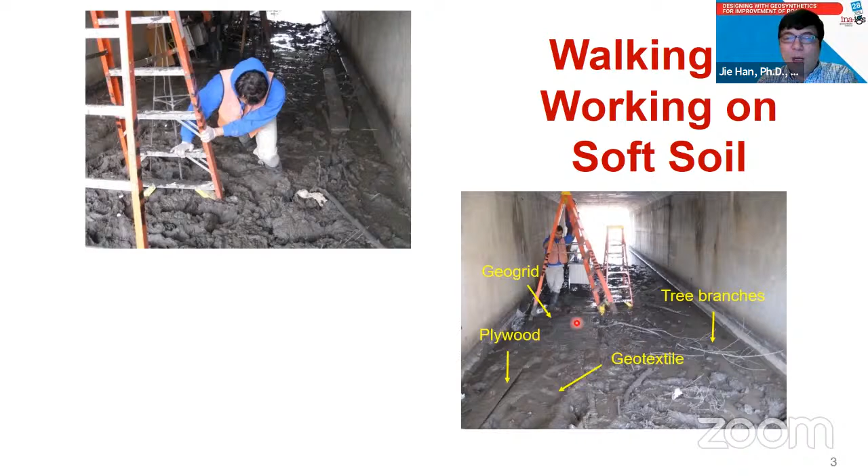Now, what's the difference between geotextile and geogrid? Geotextile is very flexible. The stiff geogrid has a little bit of bending stiffness, but just that bending stiffness is enough to support the weight of one person, and then he finished the job. But this is kind of trial and error with basic knowledge of improvement, right? He knew the soil was too soft, he couldn't walk on this soft soil, but needed some reinforcement or improvement. So he tried different ways and eventually we found a solution.

But is this the state of practice? Of course not. Let's take a look at what the state of practice is for pavement design. This is kind of a transition. We start with some kind of empirical design method - we'll talk about that a little bit later on - basically based on a statistical analysis method. Back in 1950 in Illinois, in the US, they did a lot of truck testing and developed a design method from that.

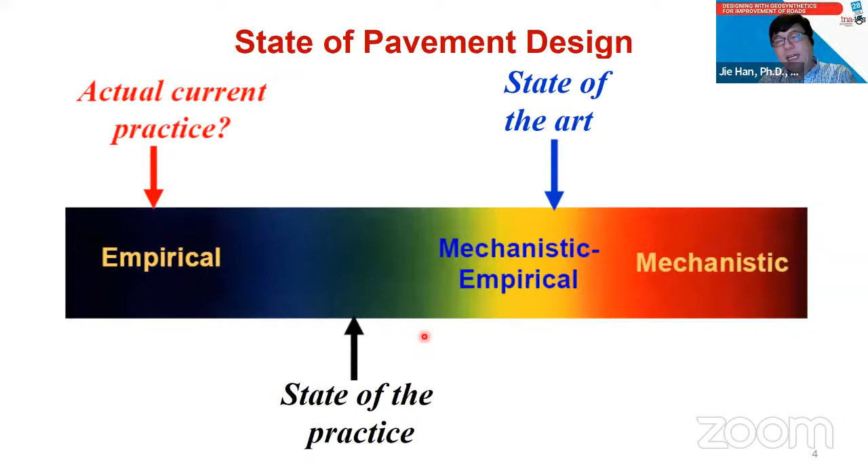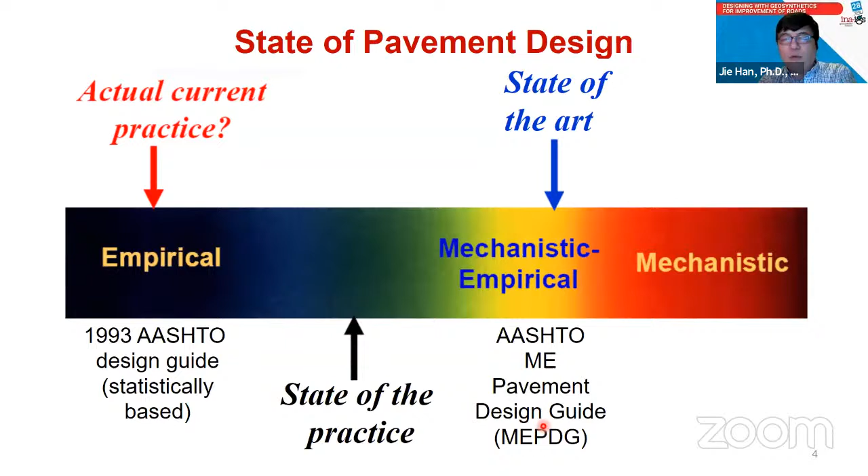Now we are moving towards the mechanistic approach. Mechanistic is basically theoretical, based on mechanics, and this is called mechanistic-empirical - some portion mechanistic, some portion empirical. So this is kind of the state of the art. What is the state of practice? We are in the transition from the empirical design method to the mechanistic-empirical design method, and I will get into that in the lecture. The empirical method is called the 1993 AASHTO Design Guide, a statistical-based method. The mechanistic-empirical one is the AASHTO Mechanistic Empirical Pavement Design Guide, called MEPDG, developed about 20 years ago. So that's the state of practice.

Let's take a look at common distress of roads, starting with unpaved roads. Unpaved road means there's no pavement surface like asphalt or concrete, but there are two different situations. On the construction side, you may have heavy vehicles going on the road to carry aggregate and other material, generating pretty large rutting - this is like a local road, also called a gravel road. Also, after use, you may get some rutting like this. Rutting is the major problem for unpaved roads. Now, how about asphalt pavement?

There are two common problems. One is rutting - even though pavement is stronger than gravel, with a larger number of traffic passes you still can get rutting like this. Or you can get cracking like this, mostly fatigue cracking. Rutting and fatigue cracking are the two common distresses for asphalt pavement.

How about concrete pavement? The concrete pavement mostly fails close to joints - basically the transversal joint, due to less support at the joint. If you have the tire sitting on this location, it will create some kind of joint crack like this.

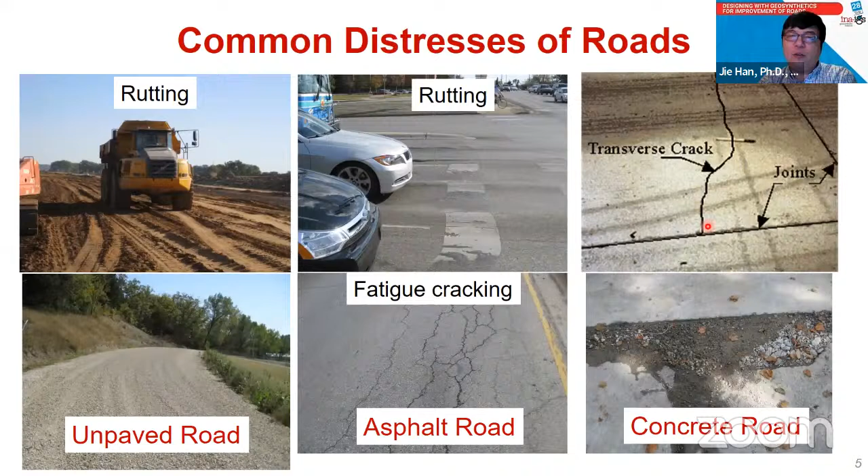Another problem is durability. This is a cold region, so water can get into the joint and get saturated. The concrete gets frozen, then expansion occurs, and salt creates some kind of durability problem. Joint cracking and durability cracking are the two common problems with concrete pavements.

So far, geosynthetics are mostly used to improve unpaved roads and asphalt roads. There are few applications using geosynthetics for concrete pavements. In my presentation today I will focus on unpaved road and asphalt road applications, not concrete pavement applications, even though I've been doing some research in this area.

Let's start with the basic parameter called California Bearing Ratio, or CBR. This is a common parameter used for pavement design. Let me explain a little bit about this parameter.

You're probably familiar with the compaction mold: you put the soil there, compact it into layers, put weight on top, and there's a piston to push down into the soil. You measure how much load is required to push it like 0.1 inch or 0.2 inch, equivalent to 2.5 millimeter or 5 millimeter displacement. That force is divided by the force required to push a crushed stone, which is considered the standard material.

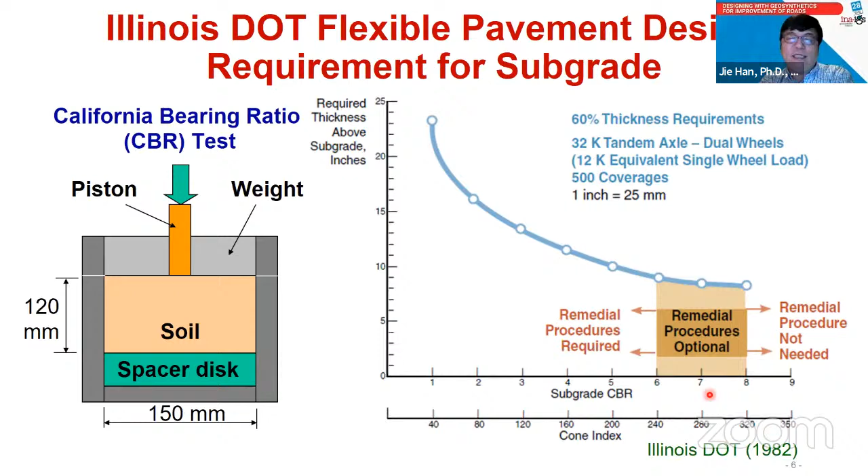That is one number: CBR if less than 6, you need to improve the subgrade. But there's also a guideline developed by the Geosynthetic Materials Association, GMA, which provides a similar guideline but with two different situations: CBR unsoaked and CBR soaked. If your road is subject to rainfall, you probably use soaked CBR - that's typically what we use for design.

In other words, if you have a CBR greater than 3, the subgrade is reasonably strong, and you only need to use non-woven geotextile as a separator. But if it's 1, 2, or 3, it gets weaker, and you need reinforcement - then you need to use geogrid or woven geotextile. Now if the subgrade is even less than 1, that is very, very soft, and for that case you not only need reinforcement but also need separation.

For geogrid, you also need to use non-woven geotextile underneath the geogrid, otherwise the soft soil would squeeze through the aperture. Or you can use the woven geotextile.

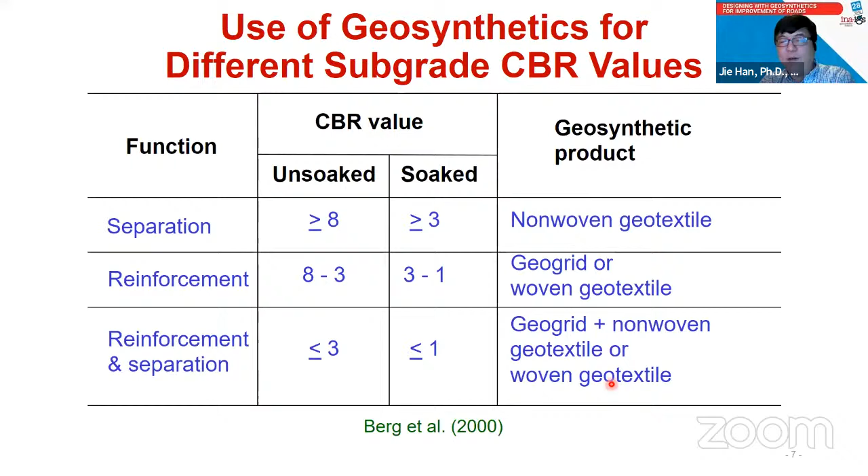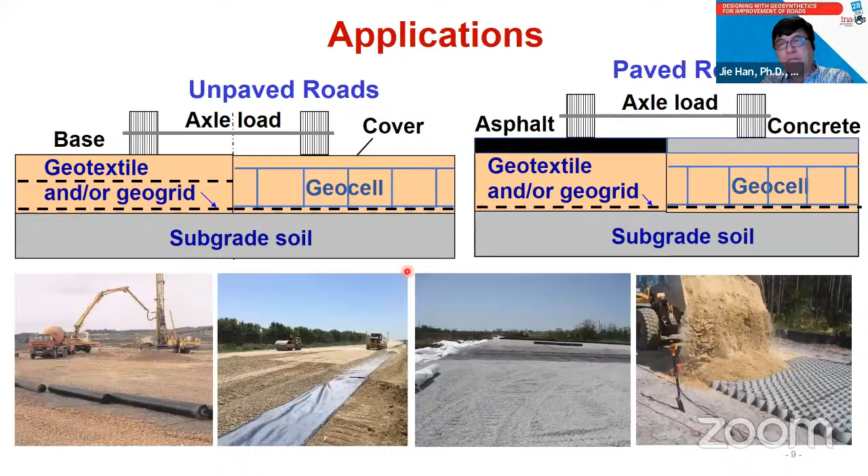In terms of function of geosynthetic in road, it can be used for separation, mechanical stabilization, and lateral restraint as confinement. I'll spend a little time on this - it's a bit different from the reinforcement I mentioned earlier, which is used for slope stability, retaining walls, and embankment applications. For roadway applications it's a little different. We came out with different terminology or function called mechanical stabilization, filtration, drainage, and barrier. So let's take a look at the mechanisms and benefits.

Let's start with this one. The first one is separation - basically separating the subgrade material and the base course material to prevent intermixing of those materials. You can keep the base course clean, just like before, with no contamination from the fine material from the bottom.

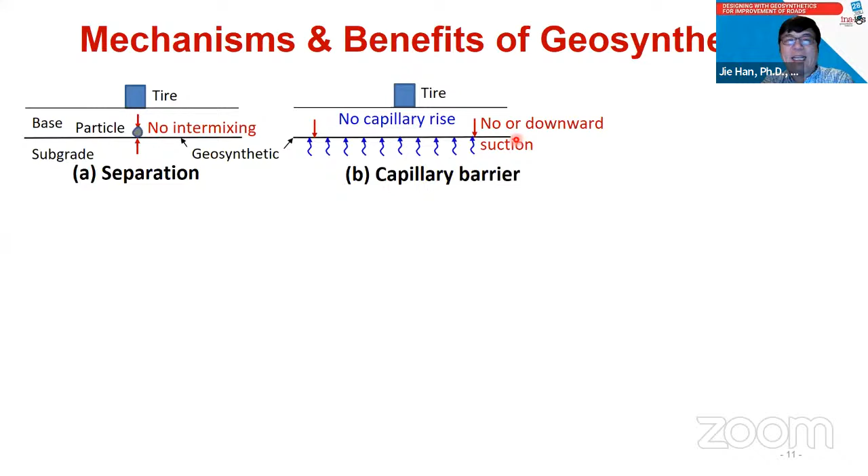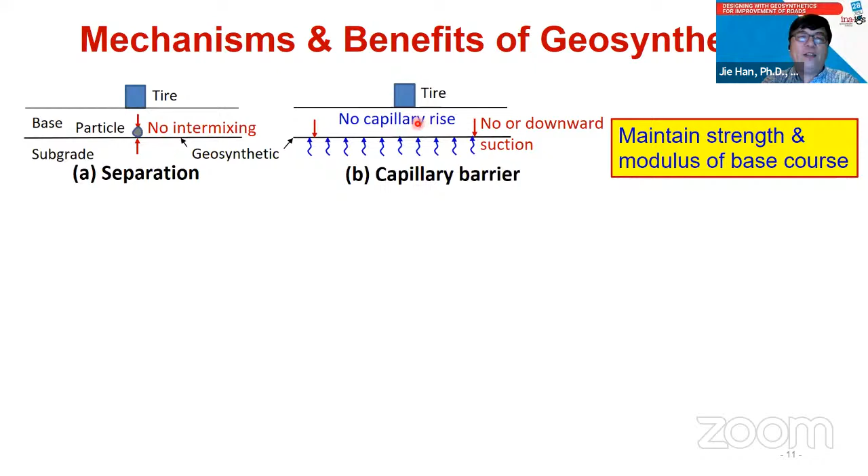But there's another situation where we can use some kind of geosynthetic - for this case, a wicking geotextile to prevent capillary rise into the base course. Especially if you have a base course with fines, they will attract water from the subgrade. If you place the geosynthetic, the wicking geotextile here, it will stop the rising. The reason is the wicking geotextile will suck the water downward and allow it to evaporate. For both of these mechanisms, basically you maintain the strength and modulus of the base course, because you try not to change the moisture content or the fine content here.

Now, this is the typical application - basically tension membrane. When we have the tire sitting on the road, we develop some differential settlement, and the geosynthetic will develop tension. The vertical component of the geosynthetic will carry the load. That mechanism we call tension membrane - this also refers to the reinforcement function.

If we have a soft subgrade, as we talked about earlier, the subgrade will start to heave up under the loading. If you have a geosynthetic here, it provides what's called vertical restraint, not allowing the soft soil to heave up - that will increase the bearing capacity of the subgrade. Also, when you place a geosynthetic here, suppose the slip surface might otherwise go deeper - because of the geosynthetic, they limit the slip surface from going deeper, increasing the bearing capacity of the base course. These mechanisms basically increase the strength of the subgrade and the base modulus.

There are two more things. One is lateral restraint. Under wheel loading, we're dealing with aggregate base, and the aggregate base will start to laterally spread. If you have friction from the geosynthetic, it can minimize lateral spreading and also reduce deformation from wheel loading. The last one is basically drainage - you can place a drainage layer so water can drain out, reducing moisture content here. For both of these mechanisms, you increase the strength and also the modulus of the base course.

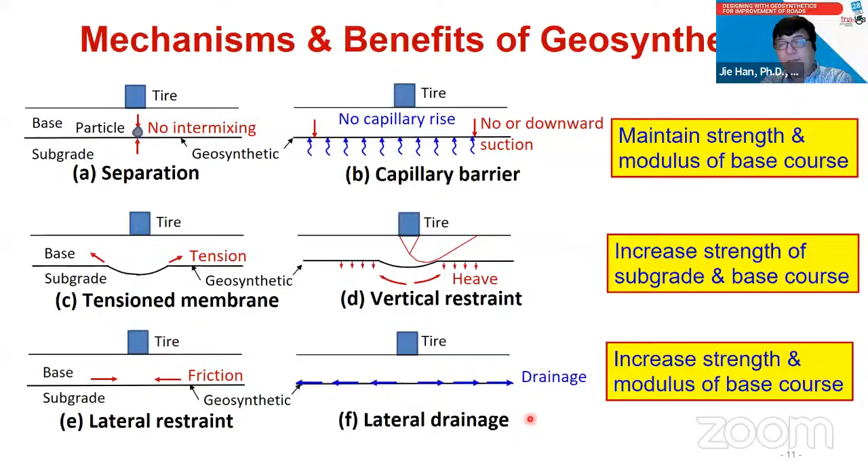The two things, tension membrane and lateral restraint, have been subject to debate about what's the difference between those two. We came out with the idea to try to separate those two mechanisms through this equipment.

This is the test setup called trapdoor test. You see there's a door underneath here, there's the plate, and we can load the plate just to see what kind of deformation occurs above this. We can also place a geosynthetic there and put a strain gauge to measure what kind of tension develops on the geosynthetic.

This is the illustration, this is the trapdoor. During this test, we lower the trapdoor first, and then we measure the strain distribution like this. This is at the edge of the trapdoor, and you see very large tension develops at the dislocation because there's a tension membrane effect developing.

After we lower down the trapdoor, we stop and fix it. Then we apply the load from the top to generate lateral spreading, and see what kind of tension will generate in the geosynthetic. That's what we see for the first one. In order to mobilize the tension membrane, you have to have an anchorage. If you don't have an anchorage, you will not have a tension membrane.

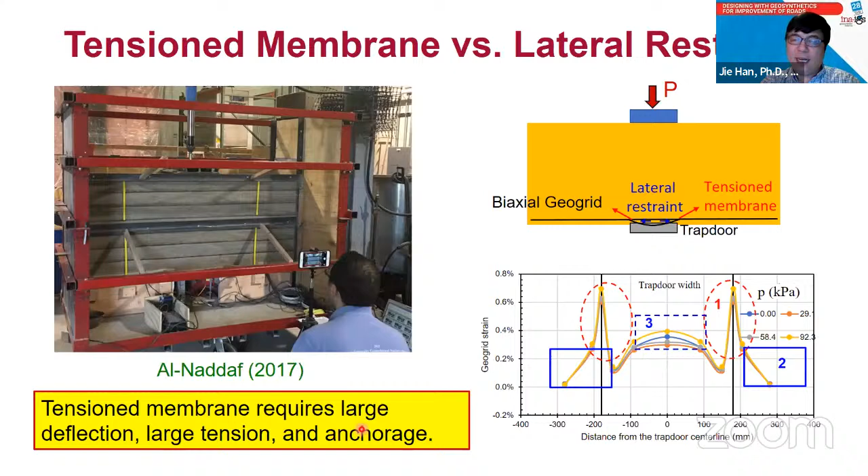After we apply the load, you see the change of stress in the middle. You will not change the tension here, only in the middle, because of the lateral restraint. The tension membrane requires large deflection, larger tension, and anchorage. Those are the three things for tension membrane.

Now let's talk a little bit more about lateral restraint. The actual lateral restraint mechanism was observed, or proposed by Haliburton back in 1981, when he described wheel loading and the generated lateral spreading, eventually generating shear stress on the geosynthetic, and also generating tension in the geosynthetic.

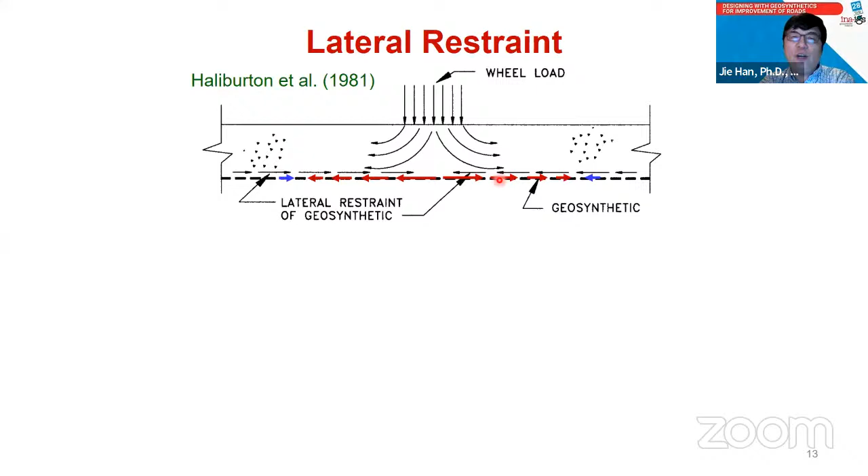But if you read carefully about this drawing, you see there is another direction, and outside this direction they actually generate compression. So you have a zone of tension, and then outside there will be some kind of compression.

The numerical analysis actually observed that behavior. This numerical analysis was done by ITASCA, comparing different kinds of geogrid apertures - this is biaxial, this is triaxial, and the wheel load. As you can see, the red in the middle is tension, and blue is compression outside.

As you can see, for this lateral restraint you don't need the anchorage. As you know, geosynthetics typically cannot carry high compression, but even if you cut the geosynthetic at this portion here, it will not affect the geosynthetic's ability to resist the lateral spreading, because the compression strength will not add much resistance to the load.

Another thing I want to point out: this is how much tension is basically calculated in the geosynthetic. For this product, if you recognize it, this is a 20 kilonewton per meter product, but you only mobilize 2.5% strength for this case. How about this one? For this one, the stress is even lower, only 1.4% strength mobilized.

For this case, as you can see, because it's a triaxial geogrid, they have a better shape to distribute the load in the ribs, but you only get almost half of this tension under the wheel. Another point I want to make is basically you don't need much strength to resist this load through lateral restraint, but the stronger product is not necessarily better.

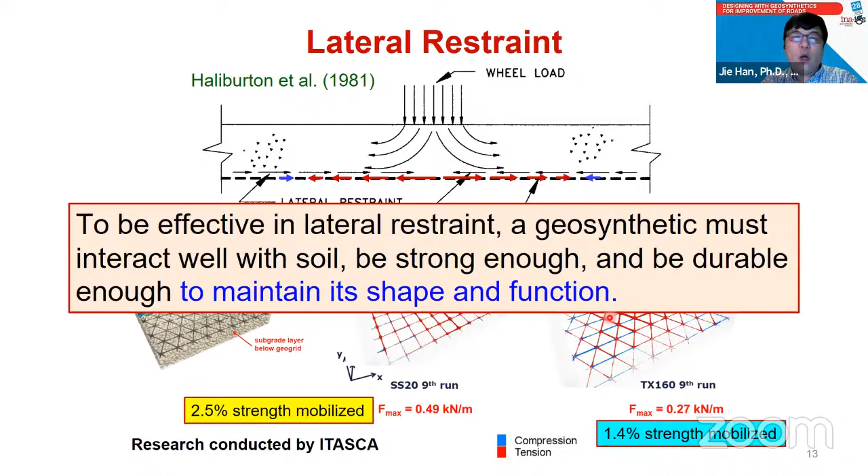Let's take a look at this case. Professor Brown in UK did this study - it's a very interesting study. He dealt with a railway application, with a loading plate under cyclic loading, and a geogrid here. He only dealt with biaxial geogrid with ballast.

He measured the settlement after 30,000 load cycles. What are those numbers? This is the 40 kilonewton per meter tensile strength geogrid, and that one deformed the most. This one is 20 kilonewton per meter geogrid, and it deformed the least. The stronger product does not necessarily mean better.

The better one is basically - he found out the aperture size. The aperture size interlocks better with the aggregate size - the maximum size is 50 millimeters, mean size is 38 millimeters. He found this optimal aperture size as compared with aggregate size, coming out with a number: aperture size of 1.5 times the maximum particle size, or aperture size 2 times the mean particle size, reaches the optimal situation, basically interlocking the geogrid with the aggregate.

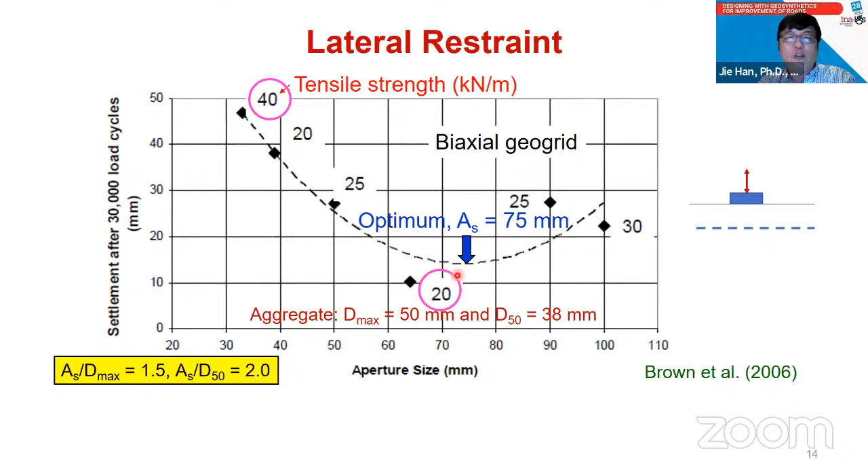Unfortunately, high strength, high resistance does not result in better performance. The performance depends on geogrid-aggregate geometry compatibility, basically the aperture size divided by the particle size.

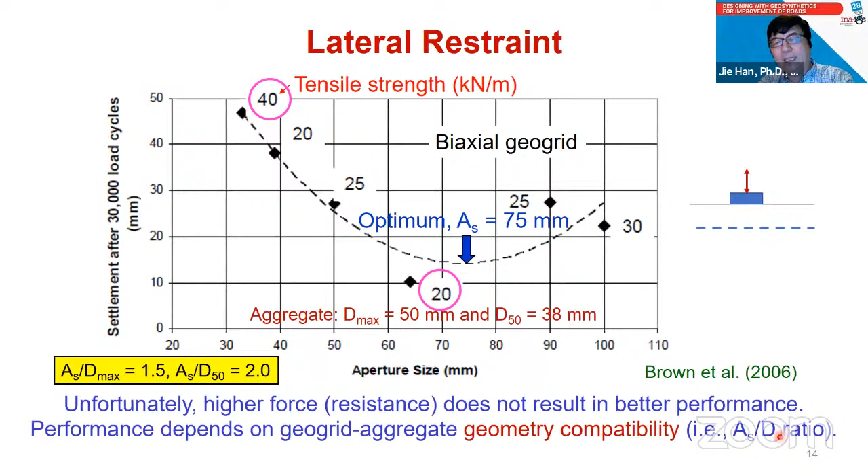Okay, now let's take a look at the comparison between lateral restraint and the tension membrane.

When we talk about lateral restraint, basically under the load, the particles have a lateral spreading. Generally, we consider the shear stress: over the shear stress there's tension in the middle and compression outside.

But that mechanism typically refers to mechanical stabilization. This typically happens at small deformation, okay? You do not need a large deformation.

Now, different from that, as I showed earlier, with the tension membrane you have a very large tension. You need a large deflection, and you also need the anchorage. Without anchorage, you will not have any tension developed in the tension membrane.

But this is basically for the reinforcement effect, okay? This requires a large deformation. Now, the tension for the tension membrane is much higher than the tension required for lateral restraint.

But they can transit from one situation to another if the deformation gets larger. Basically, when the deformation gets larger, the lateral restraint may become the tension membrane at the end.

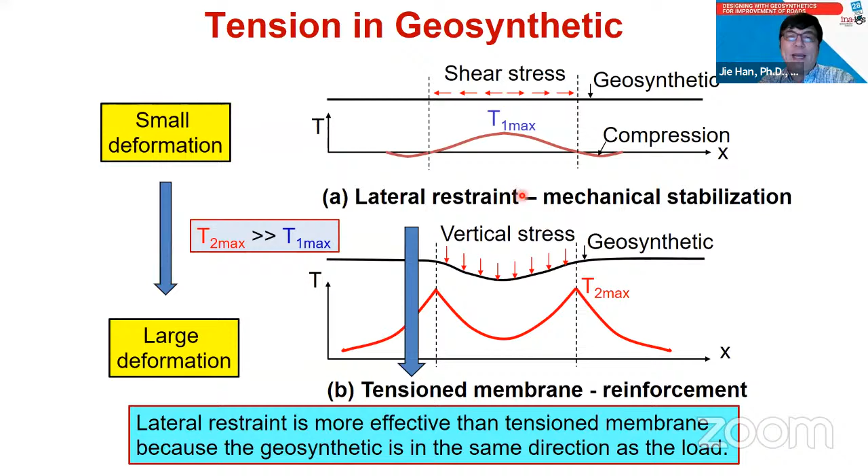Now, lateral restraint is more effective than the tension membrane because the geosynthetic is in the same direction as the load. As you can see here, this load-generated shear stress is in the same direction as the geosynthetic. But if you look at the tension membrane, the load is 90 degrees to the orientation of the geosynthetic. This is why tension membrane is not as effective compared to lateral restraint.

But for most applications in the roadway, you may actually have a different kind of mechanism. You may have separation, filtration, reinforcement, and mechanical stabilization all together. This is why geosynthetic may serve different functions in roadway applications. Therefore, a generic term, improvement, may be used for combined functions.

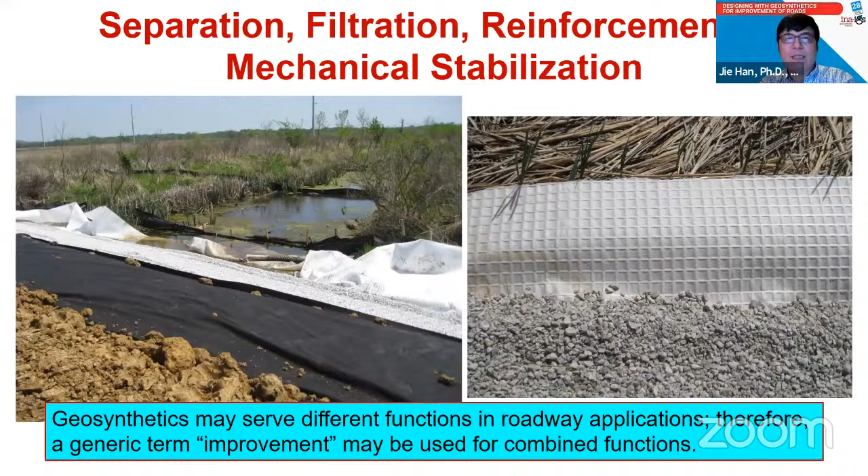Now, in order for geosynthetic to really work, first you need to make sure the geosynthetic can survive the construction.

For this case, you see they use a very large stone and dump it on the geotextile. I'm not sure whether the geotextile will survive, but this is one thing we also need to consider when you choose the geosynthetics.

The resistance to site-specific destructive force applied during project construction and in-service operation should be considered. That relates to the condition of the subgrade, the type and thickness of cover aggregate, and the ground pressure of the construction equipment. But geosynthetic can function and provide benefits only if it survives.

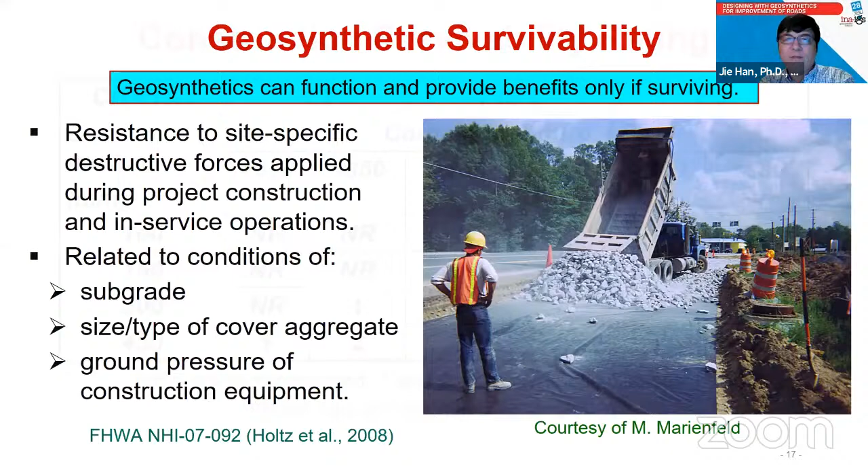Now, what kind of requirement for Geogrid? This is basically dealing with Geogrid. As you can see, for Geogrid, not only do you have class 1, 2, 3 with different strengths, but they also need to make sure the aperture size. The aperture size basically needs to be within this size range.

Also, it needs to be greater than the mean size, and less than 2 times the D85. This is similar to the results Professor Brown got in his study. This is basically to make sure that you have a better interlock.

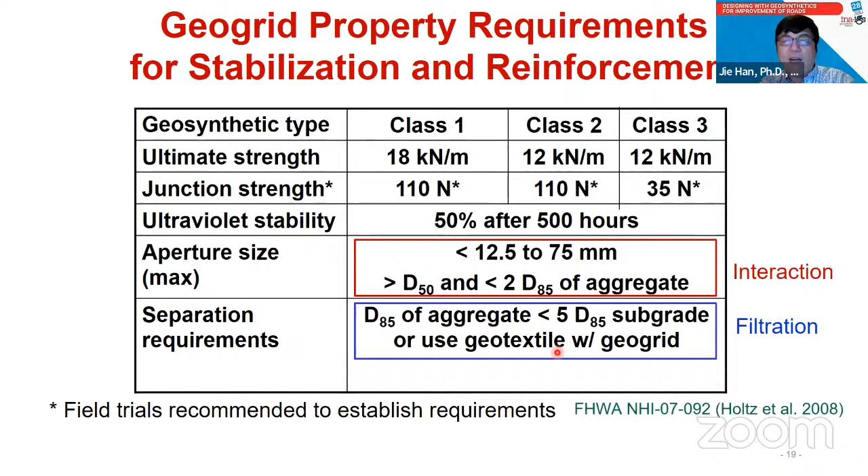Another thing we need to consider regarding separation: because the Geogrid has openings, we need to rely on the aggregate to provide the separation or filtration function. But if you don't have that aggregate, then probably you need to use a geotextile to serve as a separator.

Now let's move on and talk about the design for the two different applications, one dealing with unpaved roads, one dealing with paved roads. As we know from the mechanistic solution, if you apply stress on the top, the stress will decrease with depth, right?

But the decrease of stress for unpaved roads is different from paved roads. The reason is that paved roads have a stiff layer on top like asphalt, then a base course, then a subbase. But for unpaved roads, you only have an aggregate layer. If you apply say 600 kilopascal, at the top of the subgrade you may still have 100 to 200 kilopascal pressure. For that high pressure, the subgrade may fail if it's not strong enough.

So what is the important parameter? It's undrained shear strength for that case. The major failure, the distress, is rutting, as I mentioned earlier on. Basically it's a bearing failure. So for this case, it's a strength-based design.

For paved roads, because you have the stiff asphalt layer, base course, and subbase, eventually getting to the subgrade, the pressure will be only 10 to 20 kilopascal. So for most cases, you don't have a bearing capacity problem. However, you may have a compression problem.

The compression is related to a parameter called resilient modulus, which we'll talk about a little later. For asphalt, you also get tensile stress at the bottom of the asphalt. So the failure modes, as we talked about earlier, are rutting and fatigue.

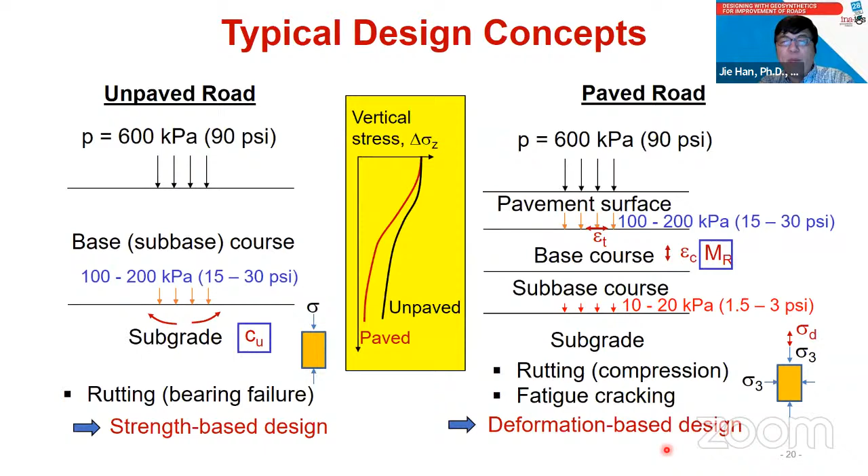The paved road design is typically a deformation-based design, different from unpaved road design. Here's a typical performance curve showing rutting versus number of passes. For unpaved roads, you will have some kind of bearing failure at the end, failing either because of the base or because of the subgrade.

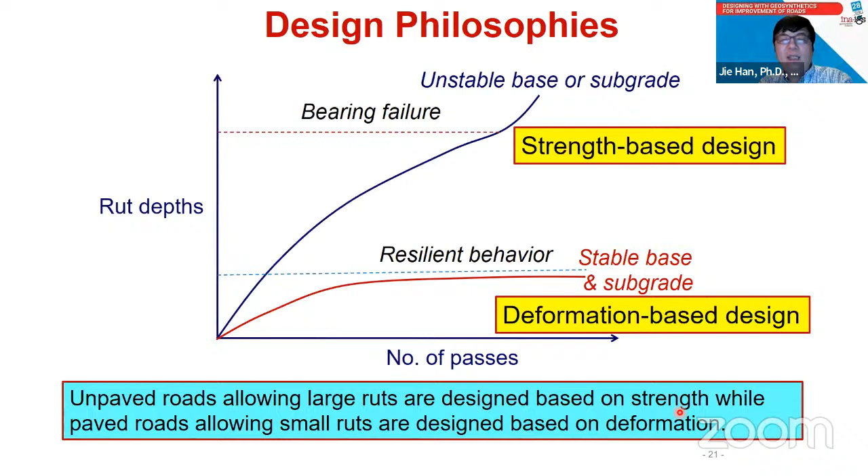Now for paved roads, this is called resilient behavior. They will have cyclic behavior, but you will have a stable base and subgrade. So unpaved road design is strength-based, while paved road design is deformation-based. Unpaved roads allow large rutting and are designed based on strength, while paved roads allow only small rutting and are designed based on deformation.

So let's talk about the concept of elastic deformation, permanent deformation, and resilient deformation. This is a triaxial test, showing deviatoric stress versus axial strain. In the first cycle, the load test control without geosynthetics, you would measure what's called the elastic modulus—this is the elastic deformation.

Then if I remove the deviatoric stress, you unload it, and you can measure another modulus. This is called the resilient modulus, or rebound. Basically, this is the resilient deformation. Now you can see the slope is not the same—typically the resilient modulus is greater than the elastic modulus.

The resilient modulus is defined as the deviatoric stress divided by the resilient strain. Now, if we add geosynthetics, because when you push down, the geosynthetic provides lateral restraint and additional confinement stress, you get a curve with smaller deformation and a somewhat larger elastic modulus. Then you unload again and get the resilient modulus.

Now what happens here: for the first cycle, you'll find that the elastic modulus for the improved case is greater than the control case. However, it's still less than the resilient modulus. Now, if you compare the resilient modulus for the control section and the improved section, their resilient modulus is actually almost the same.

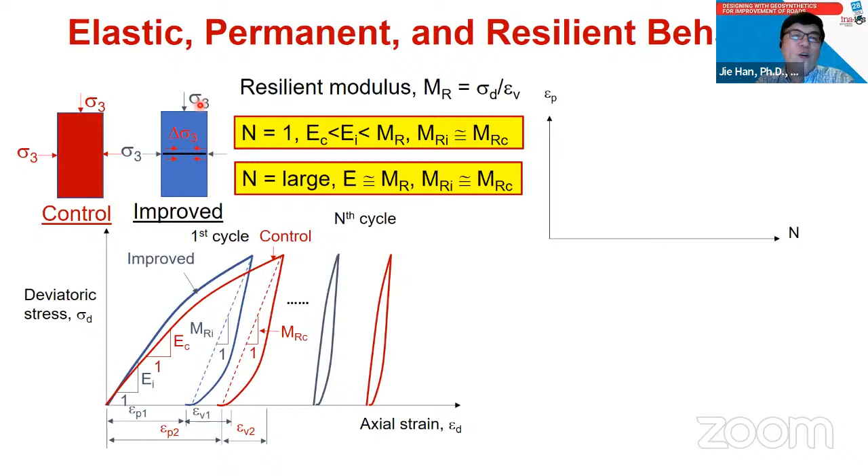The reason is that resilient modulus is defined as deviatoric stress divided by the resilient deformation, or rebound. As you know, when you release a load and the specimen starts to rebound, the horizontal geosynthetic cannot restrain the vertical movement. This is the reason the geosynthetic cannot increase the measured resilient modulus: the resilient strain is perpendicular to the geosynthetic orientation, so the geosynthetic cannot provide any vertical restraint during the rebound.

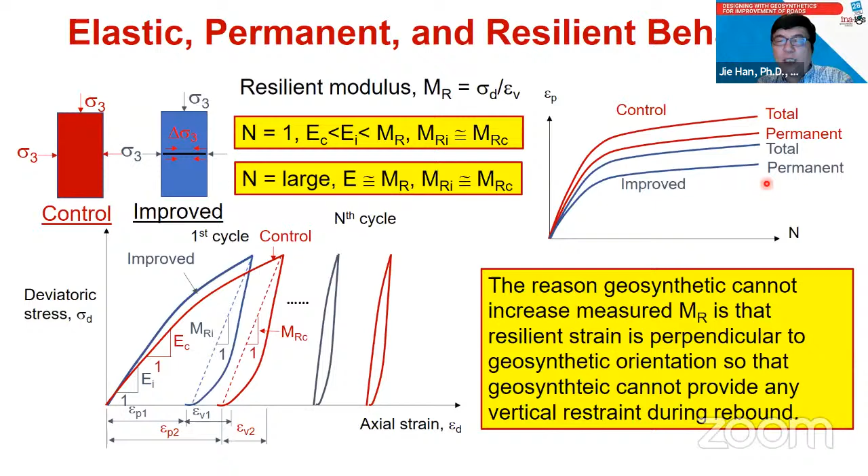So what do you end with? This is a control, like a total deformation, and then you have a permanent deformation. The difference is basically the elastic deformation. If you improve one, you have total deformation here and permanent deformation here, and eventually you get a larger reduction of permanent deformation.

This is an important point: geosynthetic is more effective at reducing accumulated permanent deformation than elastic deformation, because elastic deformation only happens for individual cycles, but permanent deformation accumulates, and the accumulated lateral restraint minimizes more permanent deformation. Let me show you the results.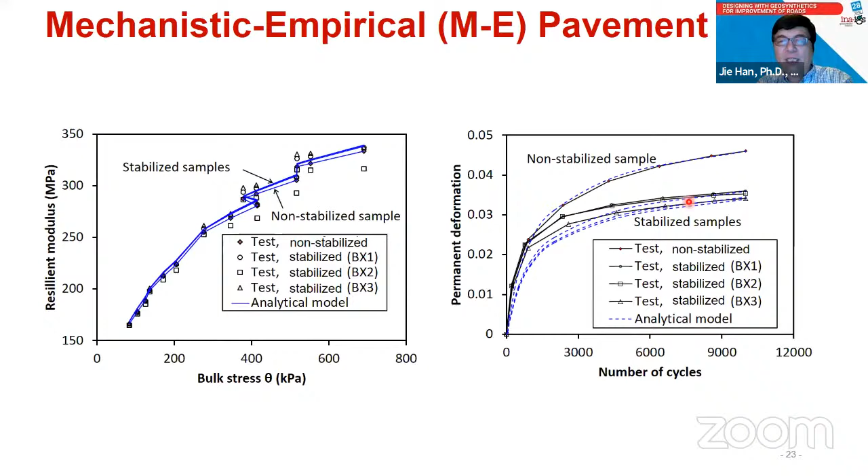Now let's move on to the design method, the mechanistic empirical design method, as I mentioned earlier. This is the new design method - a very comprehensive one that can consider climate, materials like pavement surface and base course, and traffic loadings. From traffic loading we can calculate the stress-strain response, then use this for accumulated damage.

Mechanistic, empirical. Let's talk about layer elastic theory. The famous solution was developed by Burmister back in 1945. Let's start with the stress on top of the surface, then calculate the stress at depth. If this is a uniform material, you can use the Boussinesq solution as learned from soil mechanics - the shape looks like this, largest stress at the center, decreasing with distance.

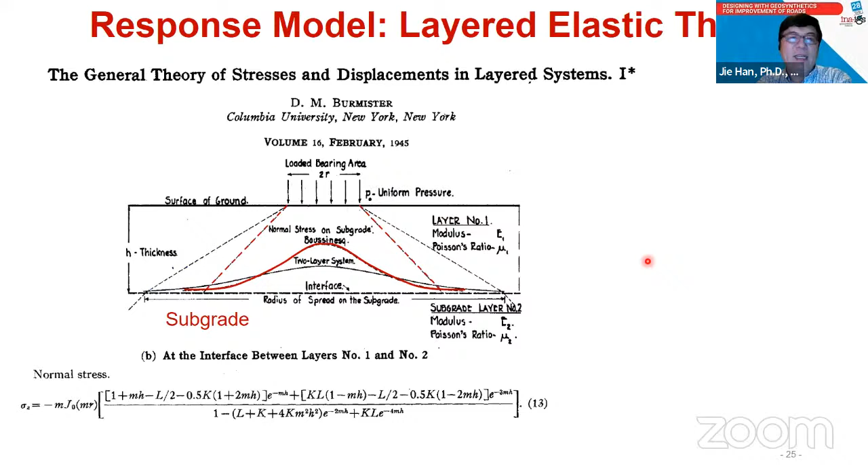Now, typically we use the stress distribution method to simplify the calculation. If we have a pavement, E1 - the pavement modulus - is greater than the subgrade modulus. This creates a situation where, using Burmister's solution and layer elastic theory, the stress gets reduced because of the stiff layer.

But now the stress looks like this. If you still use the stress distribution method, the distribution angle gets larger. That's the stress reduction, and also the increase in distribution angle.

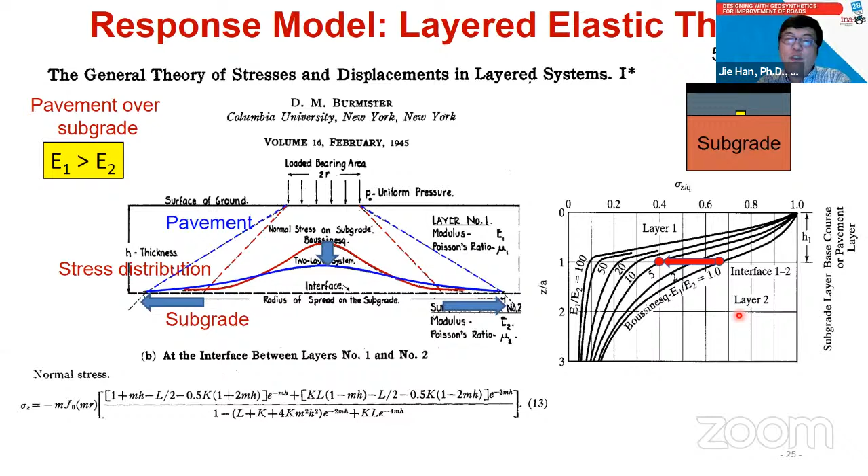So we did a study to measure the vertical stress for one case with asphalt pavement and base course, with and without geosynthetic, to see how the vertical stress changes. This is also Burmister's solution - if we have the depth here, the stress at this location, and if we increase the modulus by 5, we reduce the stress at this location.

That's the benefit of using a stiff layer in the pavement. Our results show the control section measured high stress, but if we use a geocell with the same thickness, we get reduced stress by almost half or more. The geosynthetic indeed helped reduce interface vertical stress.

Now let's talk about design with geotextile for separation in roads. As we know, in this case there's no separation - the subgrade and base course intermix, generating very large rutting.

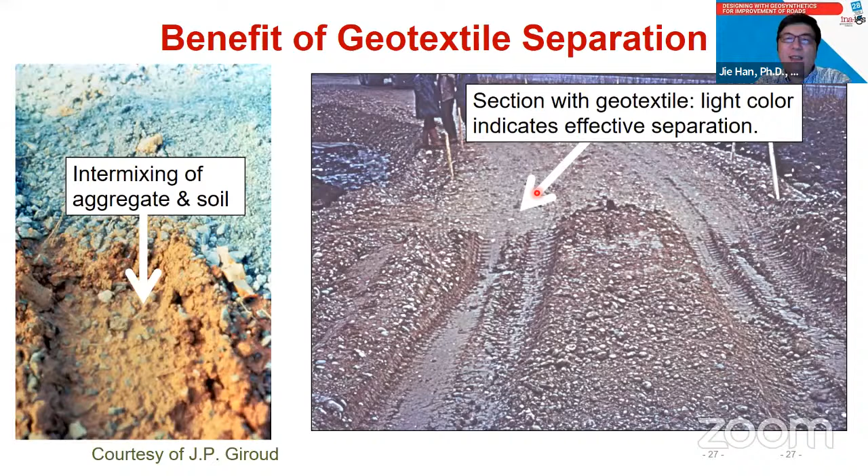Now if we place geotextile there - this is a very nice test. This section has geotextile, this section doesn't. As you can see, for this light color section with geotextile, it indicates very good separation and the rutting depth is very small. But on this side, without geotextile, you generate very large rutting. The geotextile does separate the base course and subgrade.

So how do we design for this? Federal Highway has a design guideline based on experience data. This design chart can help estimate percent of aggregate loss; the empirical graph was developed based on observations of unpaved roads without geosynthetics.

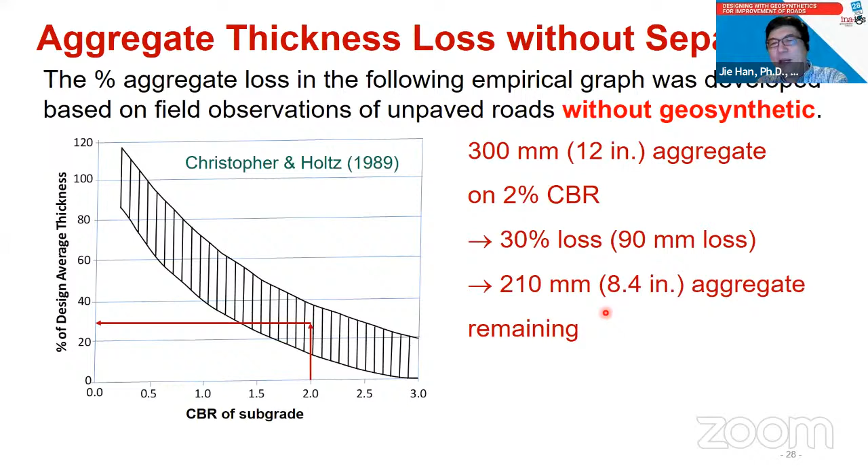Let's say if I have a subgrade with CBR equal to 2, you will have a 30% aggregate base loss. So if the base course is 300 millimeter, with 30% loss, your remaining base thickness will be 210 millimeter. Of course it will not perform as designed because you lost the aggregate into the subgrade.

The use of subgrade geotextile separator prevents this aggregate thickness loss. Now if you want to design the geotextile for long-term performance, the filtration criteria should be met.

Here is a real study from Oklahoma DOT, not too far from Kansas. The original traditional design used a 60 centimeter lime-treated subgrade before placing aggregate base, with a chip seal layer on top. Now they changed this - they did not treat the subgrade, instead they placed non-woven geotextile before placing aggregate. So basically they used non-woven geotextile to replace the 60 centimeter lime-treated subgrade.

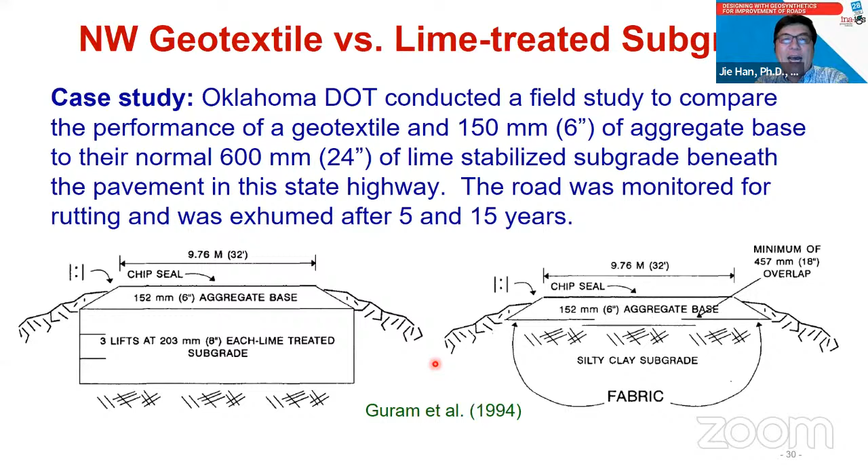They excavated after 5 years and 15 years. This is what you see in the excavation after 15 years. The geotextile still performed very well, and you can also see some wrinkling. But that also proved there was no tension membrane happening in the pavement.

As you see, if you use tension membrane, this would stretch out, right? But the fold is still there. Another thing they found out is that particles basically leave an impression on the geotextile and interlock with it, providing lateral restraint.

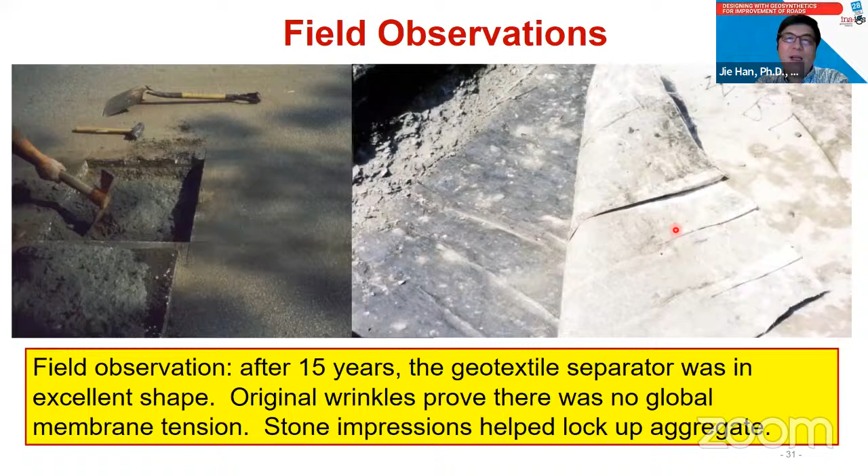This project's geotextile option only costs about one-third of the cost of a lime stabilized section. That saves a lot of money for that project.

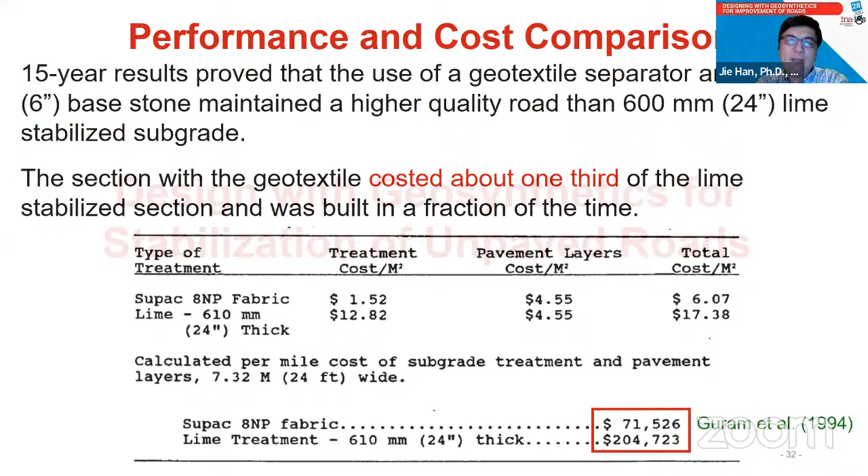Now let's move on to talk about design with geosynthetics for stabilization of unpaved roads. There are many different design methods available, mostly based on strength methods. In this presentation I'll focus on two methods due to time limits - strength-based methods, though we've also developed deformation-based methods with my former PhD students. We won't have time to cover those, but we'll talk about these two design methods.

Let's start with the Steward method. This method is very simple - they assume uniform layers and do not distinguish between base course and subgrade. They use a mechanistic solution to calculate vertical stress, making sure the vertical stress is less than the bearing capacity, Nc times undrained shear strength.

This is a strength design. Nc is the bearing capacity factor, depending on whether you use a geosynthetic or not. Without geotextile, you have a lower bearing capacity factor. With geotextile, you have a higher bearing capacity factor. They also found that if you have larger deformation, you mobilize higher bearing capacity factors.

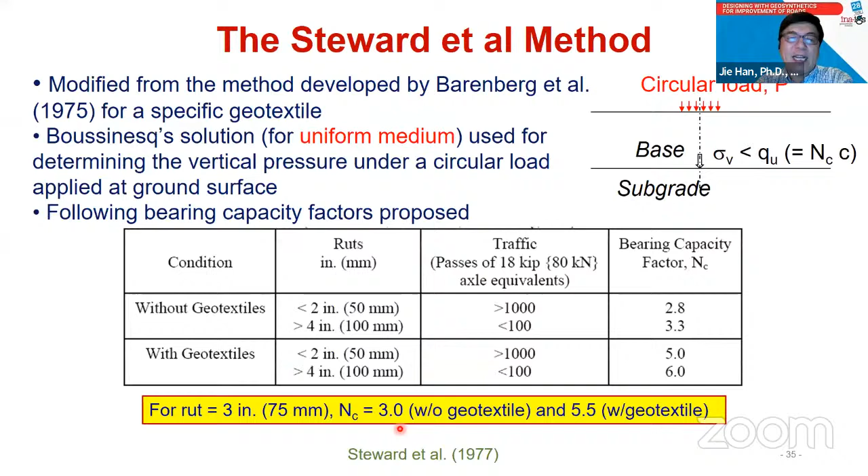If we take an average, typically we design for 75 millimeter rut depth, and let's say bearing capacity without geotextile is 3, with geotextile 5.5. They developed a design chart to help engineers select the thickness of base course. Here's an example.

This is based on a single wheel load, 45 kilonewton, with 2,000 passes. If subgrade CBR is 1%, we can estimate the undrained shear strength is 30 kilopascal. Without geotextile, using bearing capacity equal to 3, C times Nc equals 90. With geotextile, using 5.5, C times Nc is 165.

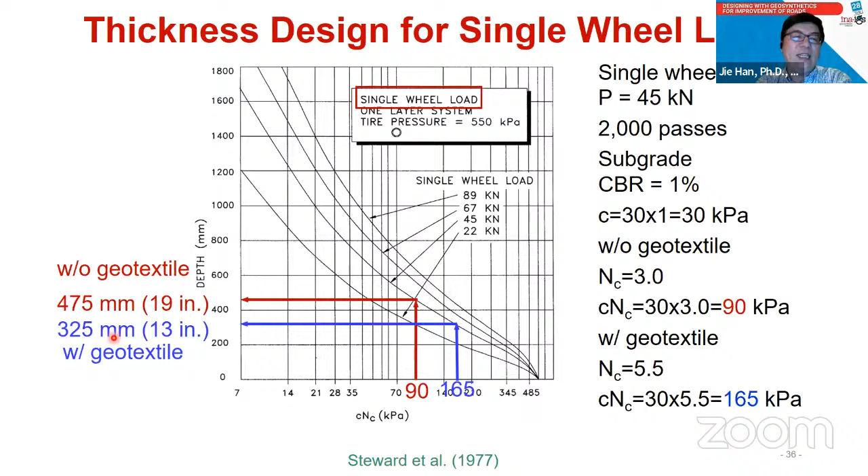Coming to this figure for a single wheel load, if you bring 90 down to the curve with a 45 kilonewton wheel load, you determine the thickness of base course needed without geotextile is 475. Now if you use 165 with geotextile, coming to the same wheel load, the thickness is equal to 325. That gives you a 32% base course thickness reduction. It's a very simple design procedure you can use.

As Michael mentioned about Dr. Giroud, we worked together and published two papers in 2004, developing a design method for geogrid reinforced unpaved roads.

This method has been included in the Federal Highway Design Manual. So I would like to spend a little bit of time to talk about this method. The first step in this method, we'll need to check whether the base is strong enough to carry the load.

This is a design chart that you may use to estimate whether the base is strong enough. Let's say, apologies, this is in English units, but at 100 PSI pressure with single wheel load of 10 kips, if you find the base CBR, you can know the number of passes it can carry. For this case, 10,000 passes. The base should be strong enough to support the traffic. All design methods assume the base is strong enough.

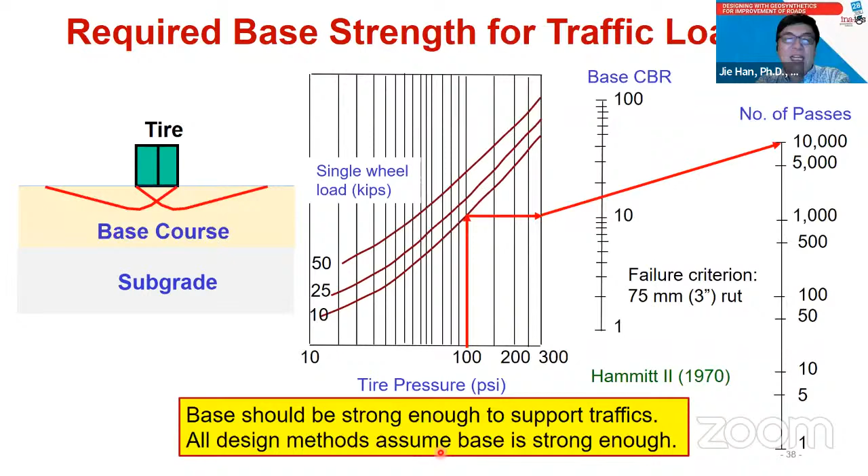But now we also use the stress distribution method to calculate the stress at the interface between the subgrade and the base course. The difference from the previous method is that now we consider the distribution angle depending on the modulus ratio, the base modulus divided by the subgrade modulus. You can calculate a larger distribution angle with a stiff layer on top.

We developed a model. Basically, initially the distribution angle is large. With traffic loading, because of deterioration of the base course, the distribution angle gets smaller and smaller, and eventually you get higher pressure, which causes bearing capacity failure, right?

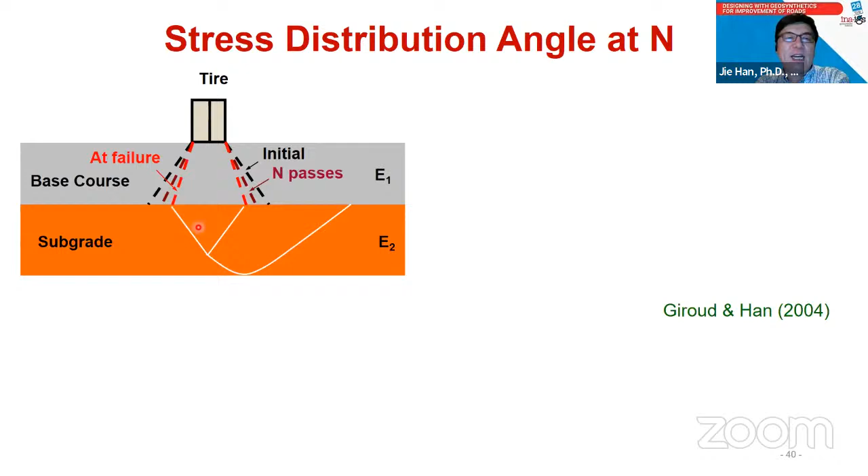We developed this empirical formula. Basically, lambda is the distribution angle reduction rate. If this equals 0, it means there's no reduction, basically like static loading. But with number of cycles, the distribution angle will reduce.

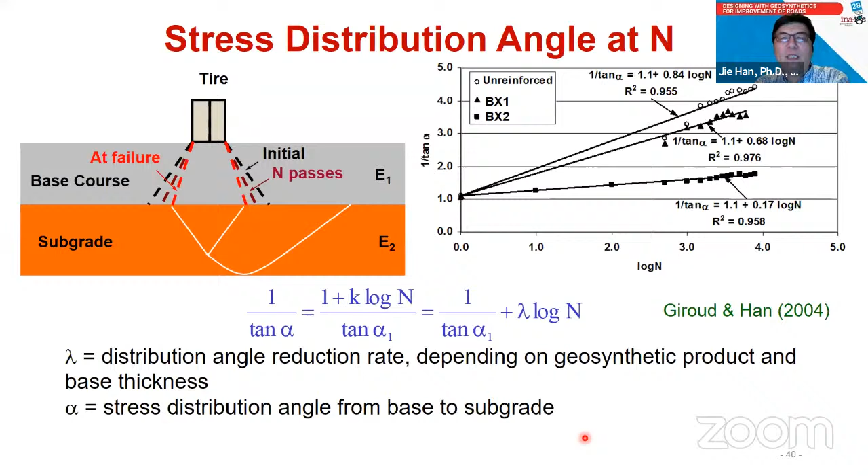Lambda actually depends on two things: the geosynthetic product, and the base thickness. If you have a thick base, lambda is smaller. If you have a better geosynthetic, lambda will also be smaller. As you can see here, this is the one with a stronger geogrid.

This is the empirical method, with damage from traffic. We assume that the tire is axisymmetric, circular, so we can calculate the pressure at this location using the distribution method.

That pressure should be less than the bearing capacity factor. We introduce M, the bearing capacity mobilization factor. Basically, depending on different rut depth, M will change. If you have a larger rut depth, M will be larger.

Similarly, we have a bearing capacity factor for different situations, like control 3.14; geotextile, because of a smooth interface, 5.14; geocell is 5.14; and geogrid will be 5.71 because geogrid provides a rough interface.

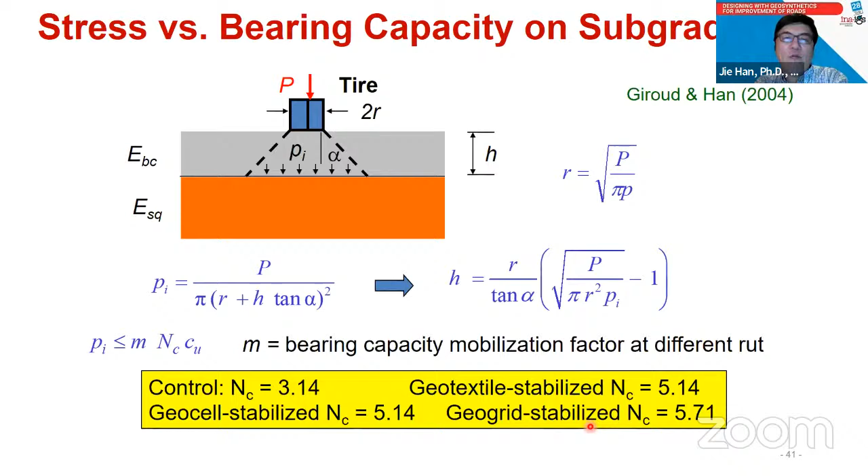We came up with a design chart and design formula like this. There's one important parameter with geogrid called aperture stability modulus, an ASTM standard. I will not get into detail about aperture stability, but basically this is the stiffness of the geogrid.

We also developed a design chart for that, this one basically describing the geosynthetic property. You need iteration to determine the thickness of the base because you have a form of H on both sides. But this convergence is very quick, typically you need only 2 iterations to reach the solution.

If we know the CBR of the subgrade is 1, and we go here with the number of cycles, we can determine the thickness for this case with geogrid.

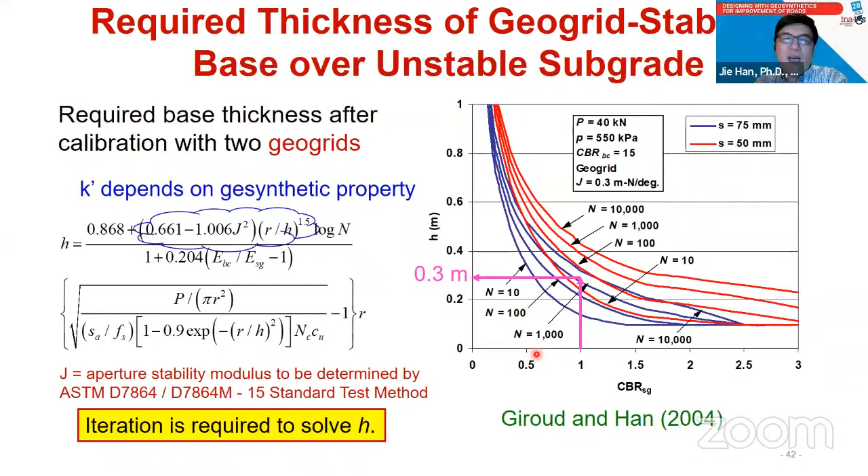This is my former PhD student, and he was working on the geocell. For geocell, because we don't have the aperture stability modulus, he recalibrated this factor for geocell.

Now let's talk about a case study here, a very interesting one actually in China. Originally, they designed with large replacement of the soil, like 1 meter, then the subbase and base course layer. Because the groundwater table is too close to the surface, when they excavated down they had all the water, and they needed dewatering.

But they came up with the idea of using a 2-layer triaxial geogrid.

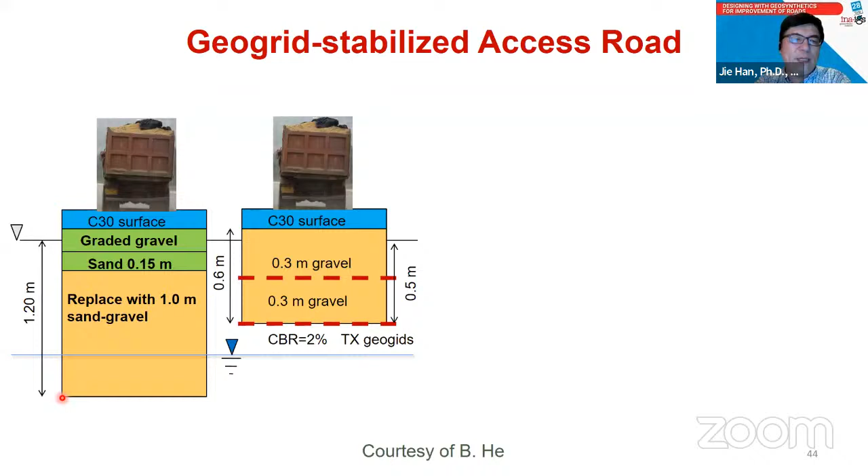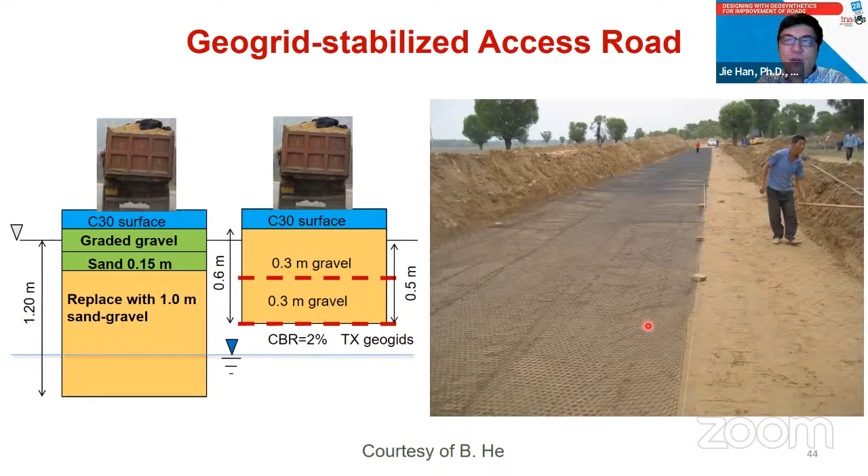As I mentioned, if the thickness is getting thicker, you may use 2 layers, but that reduces from 1.2 meter to 0.6 meter to avoid the groundwater table. Without the geogrid, excavating down with all the water, you will not be able to do anything before dewatering. But if you use the geogrid option, you don't need to excavate that deep. Then you can have a dry surface, place the geogrid, place the aggregate, and finish up with the road.

So another case dealing with geocell. This is in Canada, dealing with basic peat organic soil. It's very soft, and they need to construct a road, an unpaved road, with geocell. So here you see the geocell. When the geocell is transported to the site, basically it's in a collapsed shape.

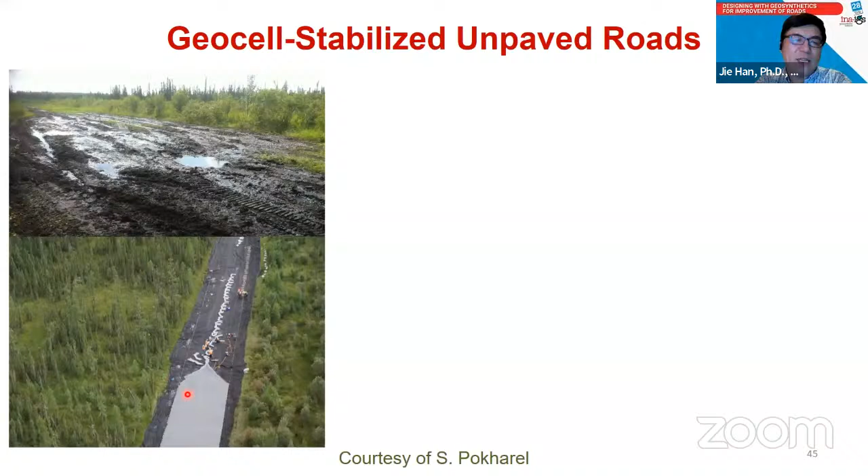After transferring to the site, you need to expand it. This is the expansion, as you can see here. After expanding, you backfill with the soil. That's what they are doing here. But there is a special procedure to follow: you need to fix the edge, otherwise the geocell will not stay open.

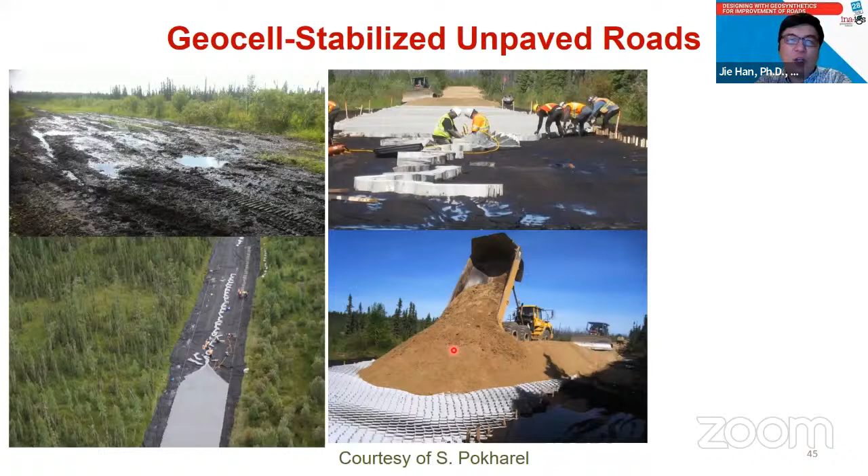Then you dump the soil inside the geocell. Basically, they use on-site soil with sand, then compact and finish up, and it can carry very heavy vehicles on this road, even though this is very soft peat material. It can successfully carry heavy vehicles with geocell stabilization.

Okay, now let's move on to design with geosynthetics for stabilization of paved roads. There's a little bit of theory here, as I mentioned earlier on. There are 2 different design methods: one is the 1993 AASHTO design guide.

There's a statistical method—this is a mechanistic empirical design method, and basically this is based on the mechanistic and also empirical approach. But this is a pavement layer here. So basically for this method, you need to calculate the structure number, basically like structure capacity. You have the layer coefficient to describe the quality of this material, times the thickness of each layer, and we add together to get the structure number, or structure capacity.

Okay, so that layer coefficient relates to the modulus of the layers. This is the subgrade resilient modulus. Now, based on the new design method, the mechanistic empirical design method, basically we use this formula to calculate accumulated permanent strain. But in this calculation, this is the key—basically this is the resilient vertical strain, as I mentioned earlier on.

Basically, this is based on layer elastic theory, using the Burmister solution. But if you can calculate the permanent strain for each layer, modified by the thickness, and add them together, you basically calculate the rut depth. This one gives you the rut depth, but this one basically gives you the capacity.

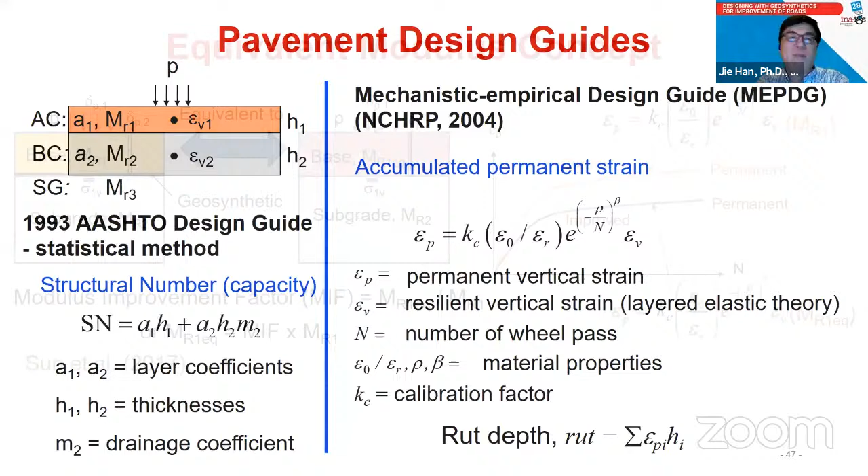Okay, now how do we incorporate the geosynthetic into this method? Those 2 methods—we propose, this was my former PhD student's proposal, a method basically to find the equivalent modulus. We have a geosynthetic here, with base course.

If we measure the pressure underneath, as I mentioned earlier, it will get reduced, and you can measure the deformation on top, which will also get reduced. But if you find the equivalent case without the geosynthetic by increasing the modulus, then you achieve the same performance, as shown here.

Okay, but if we can do that, then you can estimate what is the equivalent modulus of the base course without the geosynthetic. Then you can use the methods we talked about earlier on—the 1993 design guide, or the mechanistic empirical design method—because in those two methods, they do not include geosynthetics. But we have to find a way to get the equivalent modulus for those methods.

But if we know the equivalent modulus divided by the original modulus, then we can calculate our modulus improvement factor. The modulus improvement factor can be determined from repeated triaxial tests, larger scale cyclic plate loading tests, or trafficking tests. If we know the original modulus, we get this curve. If we get the equivalent modulus for geosynthetic, we get this one.

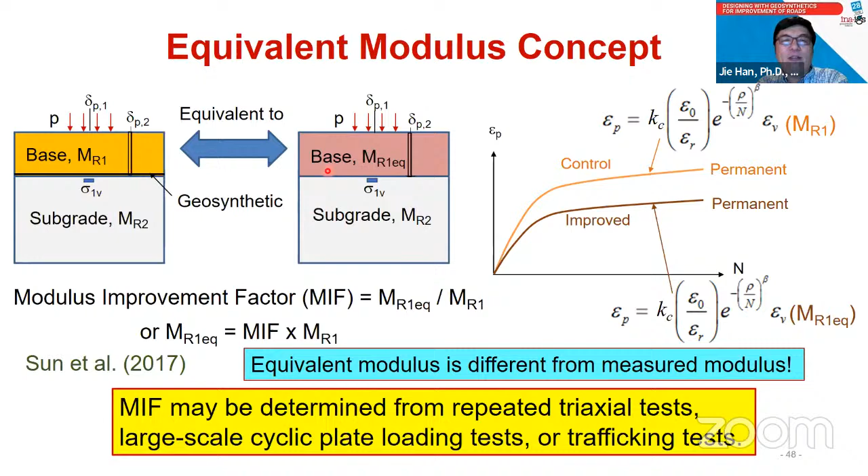And the equivalent modulus is different from the measured modulus, as we talked about earlier on. Earlier, as I mentioned, from the test, you will not get an increase in modulus based on elastic rebound, because the geosynthetic will not provide vertical strength. But in reality, the geosynthetic will reduce vertical stress and reduce permanent deformation. This is why we can back-calculate based on the vertical stress measurement, or back-calculate based on the permanent deformation. Right? That's what we did—we tried 3 different methods.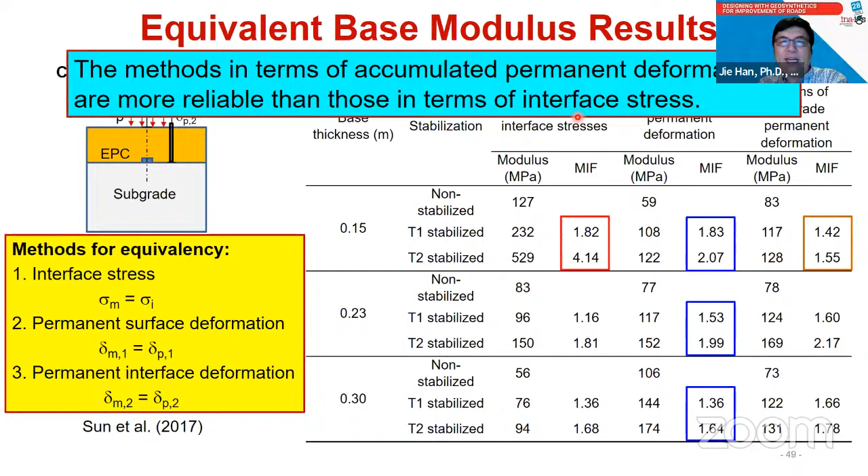But as you see here, for the stress calculation, the results are not very consistent with the deformation. We conclude the method in terms of accumulated permanent deformation is more reliable than those in terms of interface stress. The reason is the stress only depends on the point, and the deformation is accumulated.

Let me use this example to show you how we consider the benefit of geosynthetics. This uses the 1993 design guide. It's a little bit easy to do. Let's say for the base course layer, this is the formula for layer coefficient.

This is the resilient modulus. If I know the resilient modulus, I can calculate the layer coefficient. But if I have geosynthetic with a modulus improvement factor, then I can calculate the resilient modulus with geosynthetic. Let's assume the modulus for the control section is 30 ksi.

Unfortunately, this design method is based on English units, this is why I use the English unit. For the geosynthetic-stabilized case, if I use the modulus improvement factor of 1.5, then I get 45 ksi. Then I can calculate the layer coefficient: for the first case without geosynthetic, 0.14; with geosynthetic, 0.18. Then I can calculate the layer coefficient ratio: 0.18 divided by 0.14 equals 1.3.

Let's assume this case is a statistical-based design method, as I mentioned earlier. Let's say the reliability is 95%, and there's a standard deviation, and then you go here, and based on the traffic, for this case the 3 million equivalent axle load, and go along this line, then go to the turn line, and based on the subgrade...

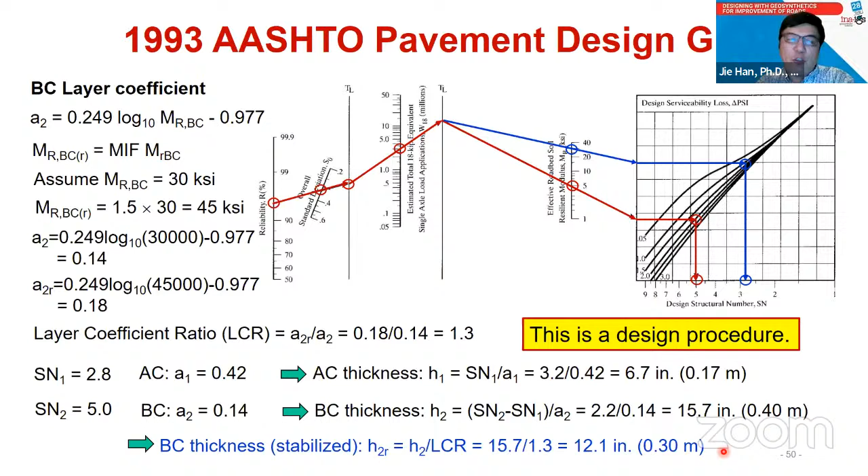But this is basically a design method. You can figure out what thickness you need for the base course with or without geosynthetic.

Let me come back to the mechanistic empirical design method. You saw this figure before. Let me put the load here. Basically, I can calculate the vertical strain, and this is the vertical strain maximum value. Based on the vertical strain, using a mechanistic approach, and then using the empirical formula, I can get the plastic strain here. So after I know the plastic strain, then I can calculate rutting, I can calculate fatigue.

That's empirical. But this method is actually an analysis procedure. What I mean by analysis procedure is you have to assume the thickness, then calculate the rutting. But if your rutting doesn't meet your requirement, you need to go back and change your thickness.

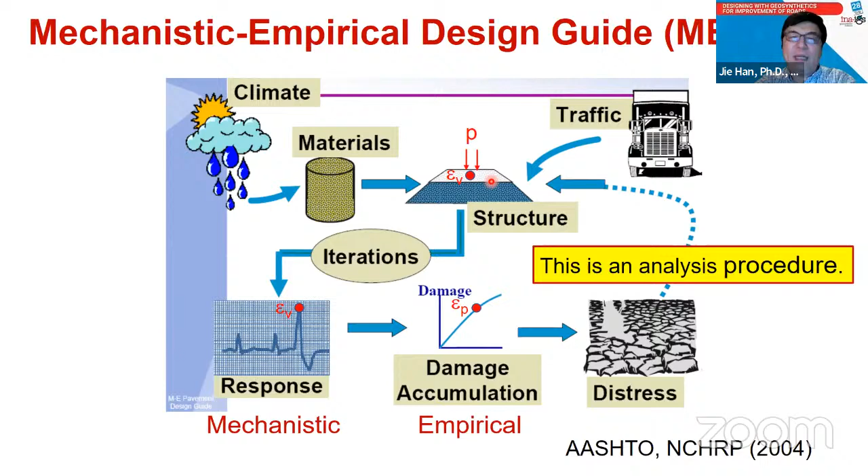But it's different from the original 1993 design guideline. They will calculate thickness for you. But with this method you have to try and see whether it meets the requirement, adjusting the thickness and doing the calculation like this. Okay, I'm close to the end of my presentation.

I will show you one example about asphalt pavement reconstruction. This is at the border between USA and Mexico, with very heavy vehicles causing rutting and damage to the pavement. The original design had a section with 180 millimeter hot mix asphalt with Class 2 high quality aggregate base, 750 millimeters thick. The subgrade used R-value, with equivalent CBR equal to 3.

As I mentioned earlier, based on the Illinois design guideline, if the CBR is less than 6 you need to do something. Here it's 3, so we need to do something. For this case, the design reduces the asphalt thickness from 180 to 150, and also reduces the base course thickness, using a slightly lower quality aggregate - a Class 4 aggregate called aggregate subbase. So you reduce the asphalt thickness, use lower quality fill material, and use a thinner section. Those are the benefits we can see here.

But in order to verify this design, they performed a plate loading test, as you can see here, testing the deformation at 2.5 millimeters and 5 millimeters, under 3 different conditions. One is basically Geogrid stabilized Class 2 aggregate base over subbase - this gives 24 kilonewtons at 2.5mm and 35 kilonewtons at 5mm deformation. If we test the low quality subbase, we get 24 here and 33 here.

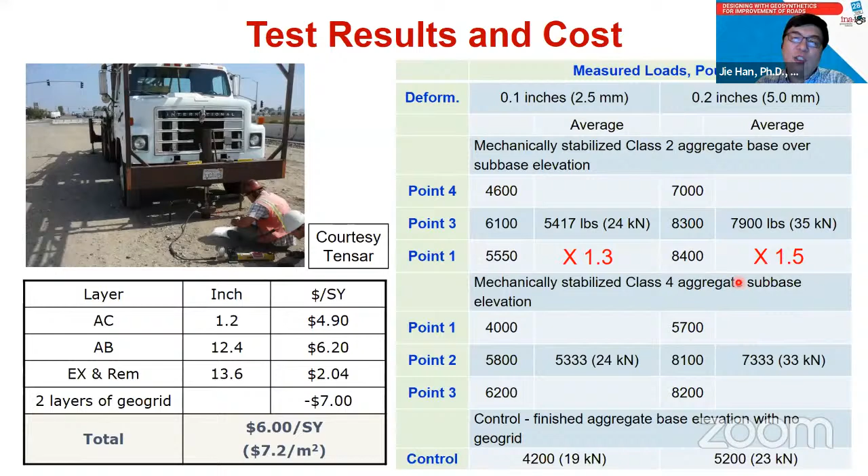Now, if we don't use Geogrid, the load capacity is 19, and this is 23. But comparing these, this is 1.3 times greater in terms of capacity, and this is 1.5 times greater in terms of capacity, even though the Geogrid section is thinner and uses lower quality material. This shows the saving in thickness and also how much cost saving - basically $7.2 per square meter saving.

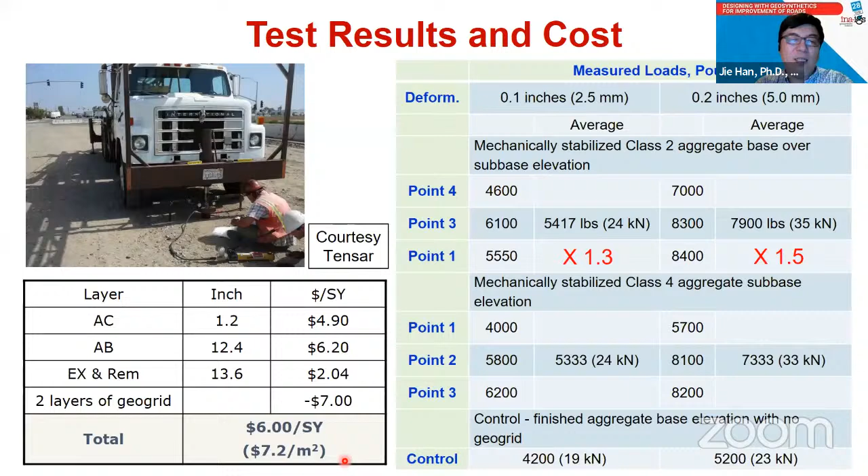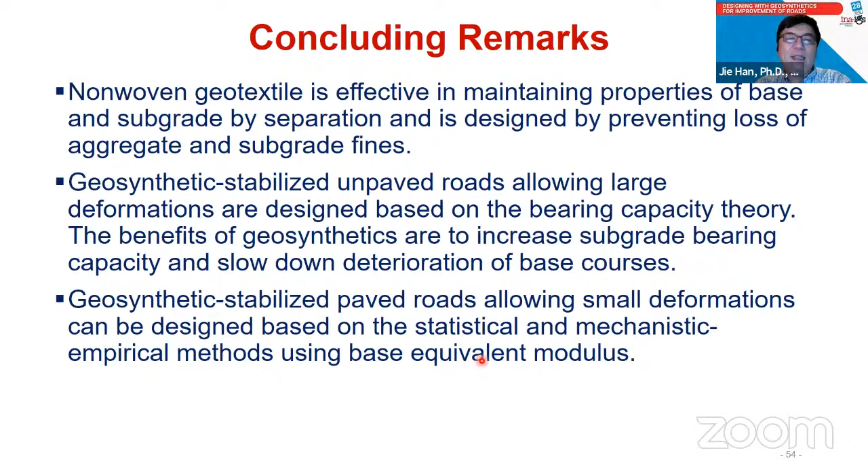So I'm going to reach the concluding remarks. Today I shared with you that non-woven geotextile is effective in maintaining the properties of the base and subgrade by separation, and is designed for preventing the loss of aggregate and subgrade fines. Geosynthetic stabilized unpaved roads allow larger deformations, designed based on bearing capacity theory. The benefits of geosynthetics are to increase subgrade bearing capacity and slow down deterioration of the base course. Geosynthetic stabilized paved roads allow small deformation, designed based on statistic and mechanistic empirical methods, using the base equivalent modulus as I described. This is current practice - current design with geosynthetics for road improvement is in transition from empirical to mechanistic empirical method. Okay, that's all I have.

Thank you very much. I think we have time for questions, right, Michael?

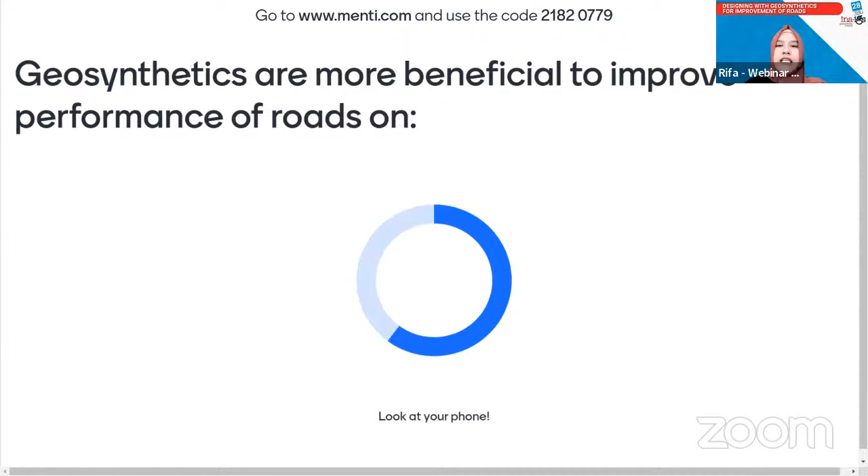Geosynthetics are more beneficial to improve performance of roads on: is it the first option, soft subgrade? Is it the second option, firm subgrade? Or is it the third option, lime stabilized subgrade? You still have 30 seconds, but you have to answer faster to get more points.

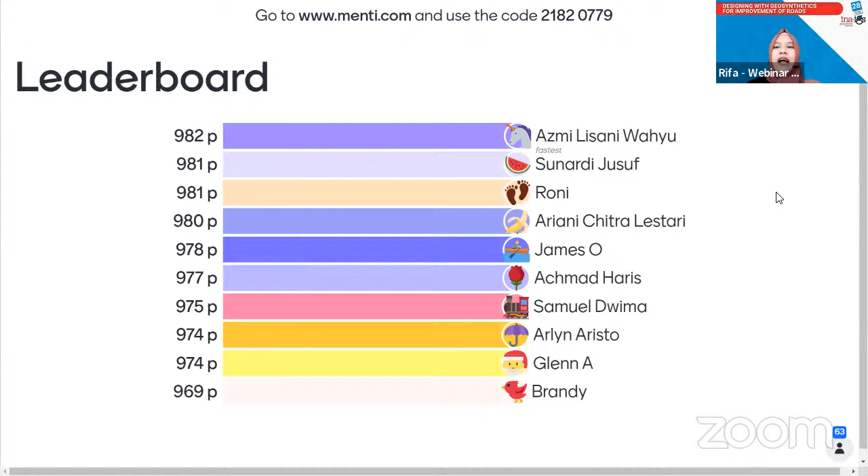Let's go to the second question without further ado. Question 2 of 3. Answer fast to get more points. Is stronger geogrid always better than weaker geogrid to improve road performance? Only two options: is it yes or is it no? You have two options, yes or no.

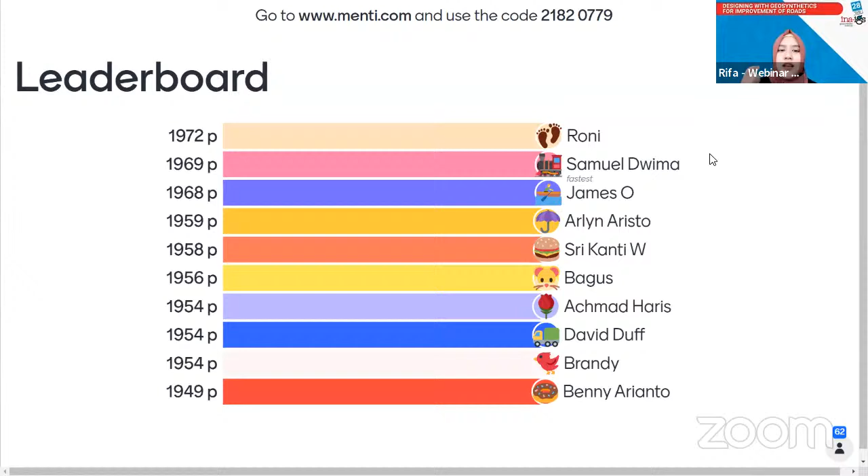Last question. Under traffic loading, geosynthetics are most effective in reducing: is it the first option, elastic deformation? Is it the second option, permanent deformation? Or is it the third one, resilient deformation?

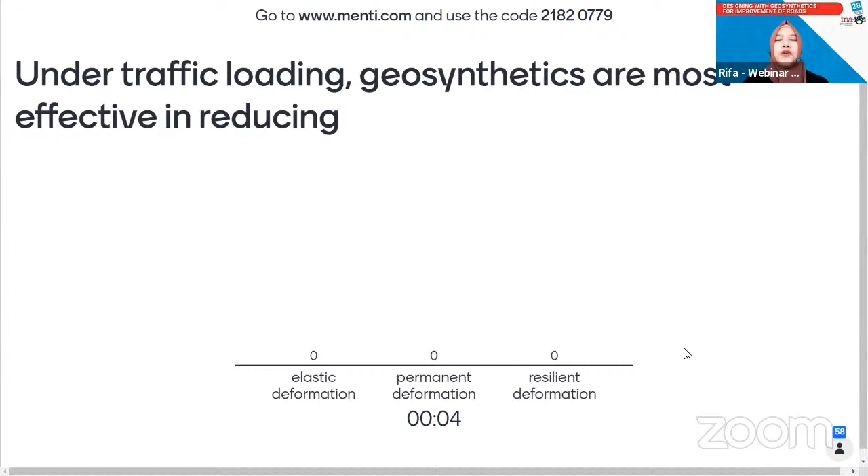You have 3 options: the first one, elastic deformation; or is it permanent deformation; or is it resilient deformation? You still have around 20 seconds, but answer faster to get more bonus points. Under traffic loading, geosynthetics are most effective in reducing - is it the first, second, or third? Okay, let's see: 5, 4, 3, 2, 1.

Time's up. And the correct answer for the last question is the second option, permanent deformation. Let's see who will win today's quiz. We will have 2 winners. Congratulations to the first winner, Roni, with 2,929 points, who will get 150,000 rupiah, and the second winner is Sri Kanti with 2,927 points, who will get 100,000 rupiah.